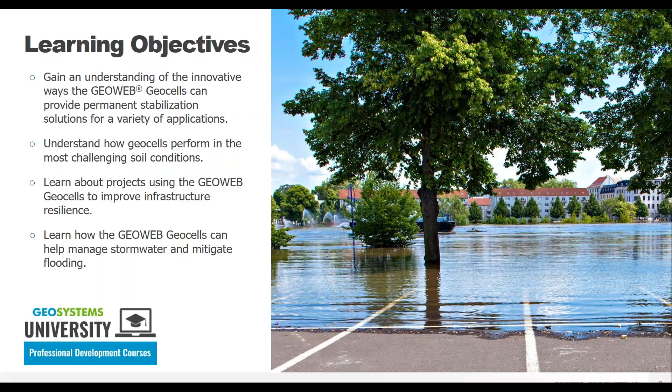A little bit of background on who Presto Geosystems is: we worked with the U.S. Army Corps of Engineers to develop geocell technology in the late 1970s and have been innovating in this market ever since. Our products have been used in over 200 countries and in every state in the United States.

We go beyond simply providing a product. We're here to help you provide a complete stabilization solution.

We operate in 3 product areas. We offer different solutions: soil stabilization using our GeoWeb geocells, which can be used for load support, slope and channel protection, and constructing green retaining walls. This is going to be our focus for today.

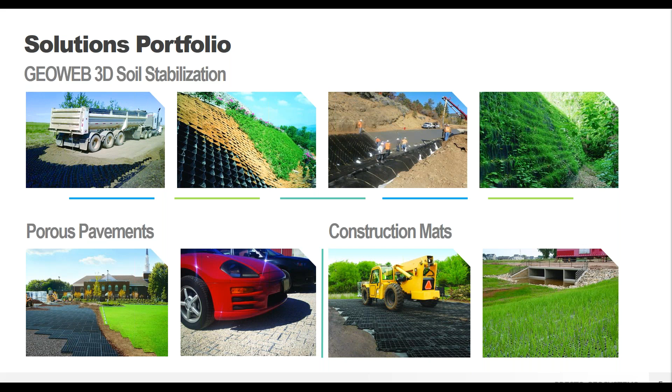We also offer porous pavements, where we have both a vegetated and a stone option, and also lightweight reusable construction mats. If you have questions about either of those product categories, more than happy to talk about them offline on a one-to-one basis. But today we're focusing on the GeoWeb 3D soil stabilization system.

Okay, so let's cover some general information about the GeoWeb geocells. For those of you who might not be familiar with this type of product, like I said, we've been doing this for about 40 years, but it still is a bit niche, and maybe you haven't heard of it before.

So the GeoWeb system is our version of geocell technology, and it consists of two main attributes. The first is the cell or container size. The cells come in 3 diameters, small, medium, and large, and then have cell heights of 3, 4, 6, 8, and 12 inches, so 5 different depths to choose from. The dimensions you choose for your GeoWeb cell are going to be dependent on your project details, whether you have specific vehicle loading requirements, what your slope dimensions look like, that sort of thing. And we here at Presto Geosystems can help you determine which one is going to be the most appropriate for your specific job.

Another thing I want to point out is the ultrasonically welded seam, and that's where all of the connecting points are. That's really important to the function of a geocell in general. The stronger the seam strength, the better the performance of the geocell. So a strong seam allows for heavier infill material, steeper and taller slopes, and better overall lifetime performance.

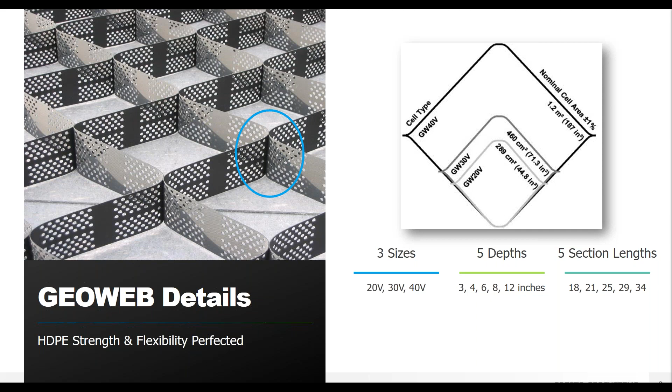So to avoid things like weld failures or the damaging effects of differential settlement on an extremely stiff product, uniformity in performance across all the elements of a geocell system is going to be much more important than focusing on a single property alone. You'll probably hear me say that a lot, especially at the beginning here. Uniformity in the geocell and in the geocell performance is going to be kind of the key takeaway that I want you to have here.

So I said there were 2 main attributes to a geocell system. The first was the actual geocell material itself. The second main attribute is the infill material, so it's what you put in those containers. An important benefit of the GeoWeb system is that even a low quality aggregate, sand, or even salvaged materials such as recycled concrete or asphalt can be used to infill the cells. Using salvaged aggregate or sand can save a significant amount of money on things like material and hauling costs. You can also eliminate the fines within your material because the cells themselves of the GeoWeb panels provide the confinement and aid in compaction of those cohesionless materials. So you don't need a cohesive material to get that compaction, the GeoWeb cells are doing that work for you.

And if you do eliminate those fines, you can significantly improve the drainage of the system and let water flow freely, preventing pore pressure buildup and preventing global failure of the system due to that hydrostatic buildup. So definitely a benefit.

And the ability to use those sands and those low quality aggregates really sets the 3D GeoWeb system apart from things like planar geogrids or geotextiles. These products require the use of really high quality materials that have extremely high friction angles to achieve that optimal performance with the 2D system. But with the 3D GeoWeb system, using that low friction angle material is going to be just fine. The GeoWeb panels can achieve their full potential even when using poor quality materials, so definitely a huge cost savings there.

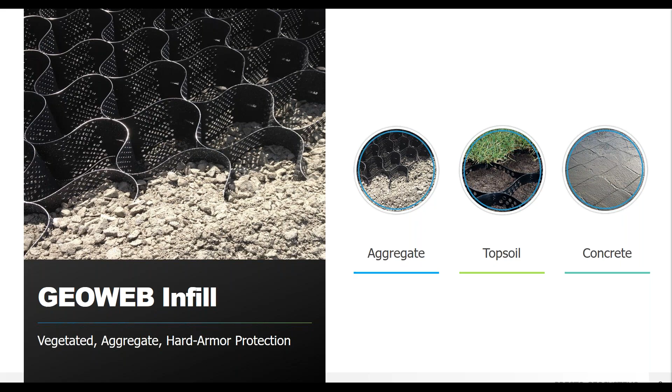So the system components to the GeoWeb system are the add-ons to the GeoWeb cells themselves. These are all the supporting pieces that help the GeoWeb system protect your project site and assure that uniform performance across the whole site area. You're going to avoid differential settlement and damaging effects of different materials. So uniformity is our keyword at the moment.

Thinking back a few slides, the GeoWeb panels come in discrete sections, and the average size of a section is around 250 square feet. Your project is most likely going to be bigger than that, so multiple panels are required. So we have what's called the Atra Key. This is the first component of a completely integrated system, connecting each individual panel of GeoWeb into a single web that covers your entire project site.

It allows for faster installation of the GeoWeb panels and is going to last the lifetime of the project, ensuring that your road, slope, or wall is protected and that the GeoWeb system isn't going to fail under anticipated loads. The specific engineering values of the Atra Key ensure that the system holds up to loading over time without the corrosion seen in metal staples or the failure of underperforming, weak plastic cable tie systems.

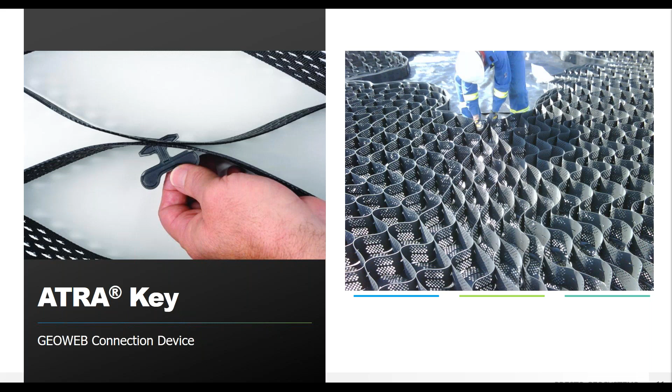We do have a specification sheet for the GeoWeb system, and it calls out this specific type of material. It has specific engineering values for this patented connector, so that you know you are getting the right material to help hold the GeoWeb system in place.

I also briefly want to mention that we offer a specialized version of the Atra Key: the Atra Wall Key. It's designed specifically for connecting GeoWeb retaining wall sections. We're going to get to talking about retaining walls in a moment, but keep this in mind. The Atra Wall Key is the only GeoCell connector available anywhere designed for use in exposed wall face applications, formulated to withstand environmental weathering and ultraviolet radiation.

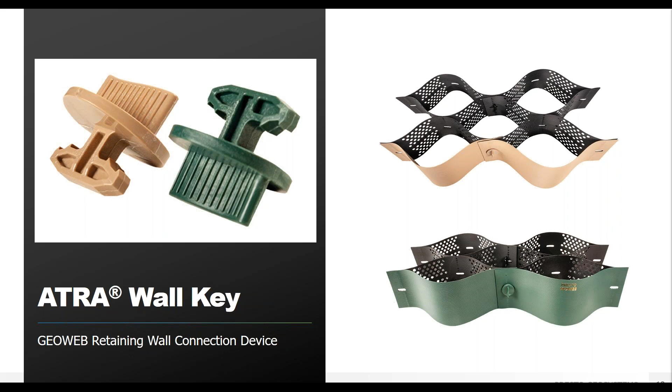The Atra Wall Key is not going to corrode or degrade over time like zip ties or metal staples. Even in really harsh environmental conditions, it can be submerged in salt water without any degradation. Pretty much anything you throw at it, it's going to hold up. Securing sections with the Atra Wall Key is a lot faster than using staples or zip ties, requires no specialized or electrical tools, and it's easy for a single person to do—single turn, click it in place, ready to go. So the Atra Wall Key and the Atra Key are both specialized components that help with that uniform system I want to make sure you're aware of.

Next we can take a closer look at the anchorage options. If the GeoWeb panels are laid completely flat, anchorage is usually not necessary because gravity is doing all the work to hold it in place. However, if you place these on a slope and that angle starts increasing, you get the driving force of the infill material exceeding the resisting frictional force of your slope. So overcoming all of that, it wants to slide to the bottom of your slope, and you want to avoid that with some sort of anchoring option.

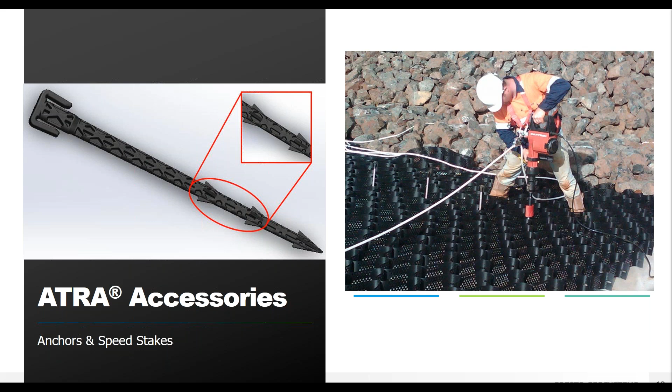For shallow slopes, a general rule of thumb is if it's shallower than 2 horizontal to 1 vertical, around 26 degrees, you can use stake anchorage. We have two options: a standard steel rebar, and one made of pure high-density polyethylene, which is pictured here. HDPE might be good if you're in a saltwater environment, like along a coastline, since metal would corrode there. Just an option—but both are easy and fast to install, nothing too unusual about stake anchorage.

But the other option that maybe people aren't as familiar with is the tendon option, which is for steep slopes. If you're getting steeper than that 26-degree slope, or if you're over a surface you can't puncture with a stake—like a geomembrane liner over a sediment pond, where you don't want to puncture through that liner and defeat its purpose—you need to be able to suspend the GeoWeb system over that liner without damaging it.

So that's where we would recommend a tendon anchorage system. These are polyester tendons that are run through the GeoWeb panels, you can see them in the photo there. And then you use our Atra tendon clips, which are load transfer devices. Basically, they take the load from the soil to the tendons to the GeoWeb panels and then up to the crest of the slope. So just something to keep in mind.

Again, we can talk about this in more detail if you are curious how it works. But it is specifically designed for the GeoWeb system, helps with that uniform performance, and is going to last the lifetime of your project, as opposed to something that's going to degrade or break down over time due to environmental conditions.

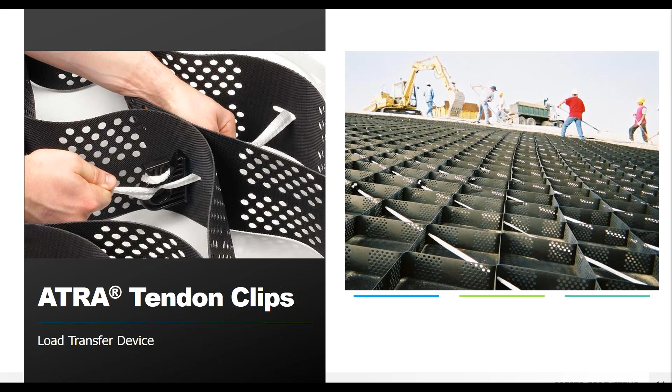Okay, so something I want to point out goes in line with everything I've been talking about recently, about that uniform performance and how a geocell performs. It is critical that both the factory welded junctions, the internal seams I pointed out a couple slides ago, and the field joined junctions, the Atra keys and Atra wall keys I pointed out as well, perform at a level commensurate with the cell wall.

You want the junction, you want those seams and those keys to be as strong as the GeoWeb panel itself. Otherwise, you're just introducing a point of failure. So the three primary elements of that GeoCell system, the cell walls, the internal junctions, and the mechanical junctions, all must perform uniformly as a complete system.

As I mentioned before, an incremental improvement in one characteristic, such as wall stiffness, is only going to be valuable if there's a complementary improvement in the other components of the system. So as stiff as you make the cell wall, you have to make the junctions and the field connectors the same stiffness. Otherwise, now you have a point of failure, and that increased wall stiffness doesn't mean anything because it's going to fail at the junction before it would fail in the cell wall.

So Presto Geosystems does offer solutions for many different types of road and highway applications. This includes load support for unpaved roads where you have a gravel surface, road shoulders, and base stabilization underneath paved roads. And then stormwater control is also possible with the GeoWeb system through things like roadside ditches, drainage channels, culvert outfalls, and having that aggregate system be a little more porous to allow some pervious pavement aspects as well.

So the purpose of cellular confinement of the GeoWeb system is pretty simple. It's meant to stabilize the movement of unstable soils, both horizontally and vertically. The weaker the subgrade conditions, the more practical it is to insert the GeoWeb system into your design. So it's an engineered system integrating a couple different types of geosynthetics with the best method of confinement and subgrade stress reduction in the industry.

So today's focus is going to be on a lot of different types of how the GeoWeb system works. But if you do have specific questions on roadway infrastructure, such as intermodal yards, railroad ballast reinforcement, things like that, feel free to reach out. We have extensive knowledge in that as well. So if there's something specific that I don't get to today, this is a really general overview. Please feel free to drill down and get into specifics. We would love to talk to you about it.

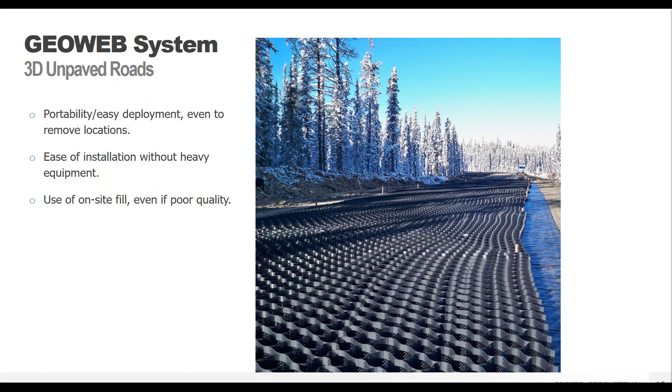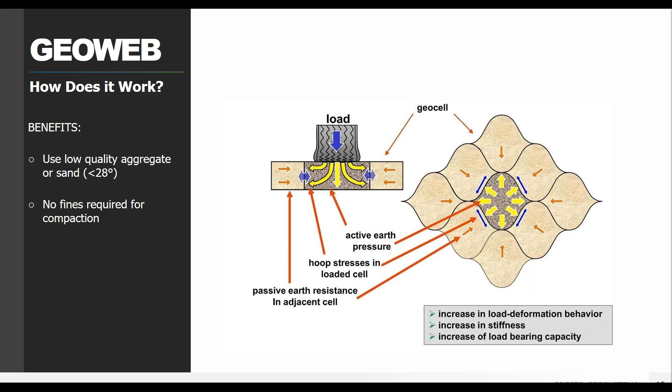So in a load support scenario, vertical deformation can really only occur when there's either compression or compaction of the soils, or through lateral movement of the soil. So by spreading out the load in a classic granular fill approach, one can reduce the compaction of near surface soils, but only with cellular confinement can one ensure that there's no lateral shifting. So there's not going to be any ruts, you're not going to get potholes, you're not going to get those sunken drive lanes.

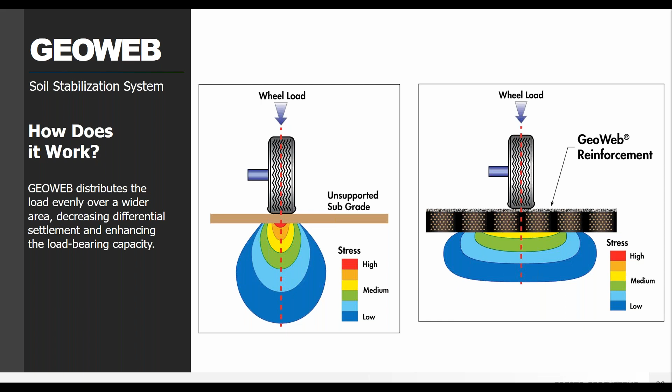The mattress effect of the GeoWeb system reduces the stress reaching your subgrade. Here you can see the stresses on the subgrade of the unsupported grade on the left, and then with the GeoWeb reinforcement on the right. You can see how there's a complete elimination of the highest stresses, the red and the orange, at the surface of the system when there's GeoWeb reinforcement. So the stresses are reduced and then distributed over a wider area - again, that's that mattress effect. So it's going to reduce your stress reaching the subgrade, leading to a significant decrease in deflection and rutting.

And again, by eliminating that lateral particle movement, the soil isn't getting pushed to the side because of vehicle tires. The GeoWeb system can stabilize the surface, eliminating the need for constant maintenance. You're not having to go back and grade out, refill in the ruts, that sort of thing. It's just going to be a good, smooth surface for the lifetime of the project.

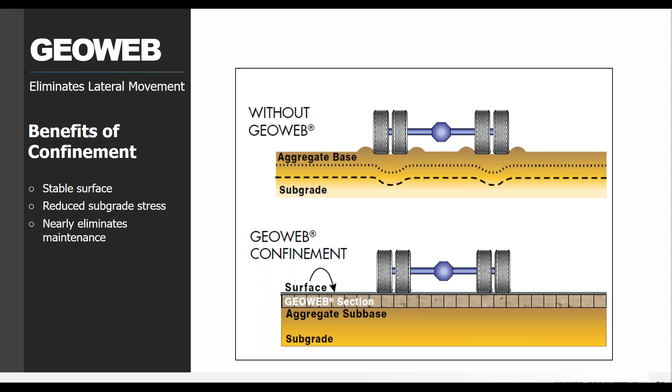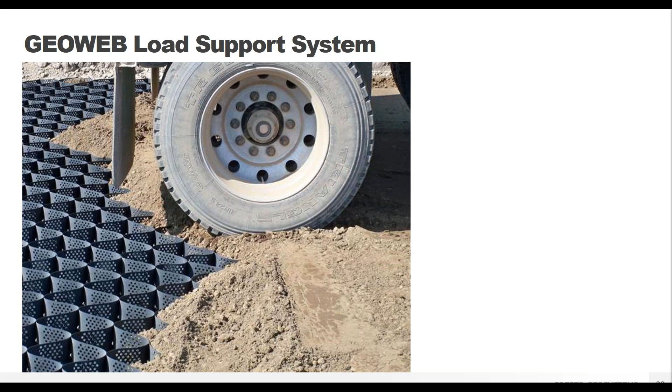So here we can see an impressive load support benefit. This is an 80,000 pound loaded dump truck, using standard AASHTO H20 loading parameters, on a partially filled GeoWeb panel. You can see how the cells push back against each other to support the load, and that only the adjacent cells need to be filled for support. This is a great benefit to using the GeoWeb system, that you don't have to have every single cell completely filled before the road is actually usable. So you can reduce your construction time, your materials, that sort of thing. You can actually use the road as you're building it as an access road to new locations.

So the GeoWeb system is often compared to 2D geogrids, and they do start with a similar concept. However, due to the 3D nature of the GeoWeb system, it's got that defined depth. The integrated infill plus geosynthetic system acts as a composite layer where the lateral earth pressures are mobilized and transferred across a three-dimensional network of integrated cells. So basically, by having that depth and that confinement of the material, you're actually creating a layer that's going to help reduce that stress. Whereas with a 2D geogrid, you're inserting the geogrid and then you have to find your confinement and your strength through other means.

So we're making that into one thing with the GeoWeb system. This is where it can be really beneficial, in that you can use those low quality aggregates. You can use sand, salvaged material from excavations, recycled concrete or asphalt, things like that. You don't have to bring in expensive engineered aggregate like the geogrids require. You don't need that with the GeoWeb system.

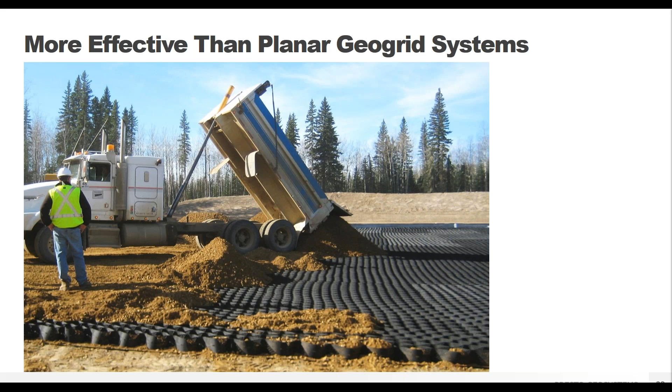Another thing to point out is that geogrids do very little to stabilize the surface. With the lateral confinement within the GeoWeb panels, you're not going to get those ruts. You're not going to see the lateral shifting of your aggregate or soil particles that you constantly need to come back and fix. Geogrids don't protect against that, so you're going to have that constant surface maintenance with a geogrid. You're not going to with a GeoWeb. Just something to keep in mind.

Continuing the theme of unpaved gravel surface roads, using a washed or clear stone in the GeoWeb system allows you to build stable and permeable low impact development access roads. Site access, either temporary or permanent, is a pretty common application. So if you're going through environmentally sensitive areas, wetlands, or along coastlines or shorelines, where you really need to make sure you're not impacting the flow of water in any way, having a permeable aggregate road like this is a great solution.

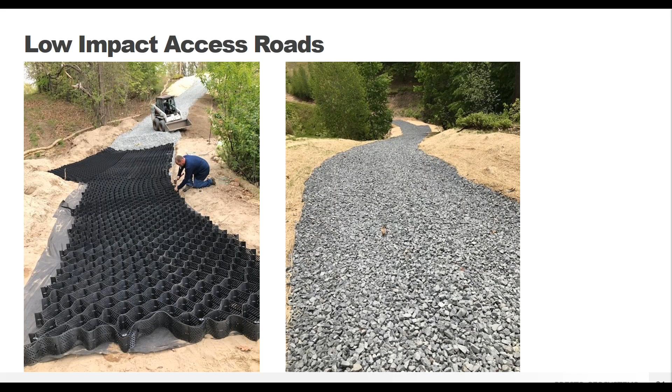Heavy loaded vehicles can still drive on the GeoWeb system even in sensitive environments like that. Normally you're not going to drive a dump truck through a wetland, it's just too soft and mucky. With a GeoWeb stabilized road, you have that ability, that option. Definitely something to keep in mind if you know you're going to encounter those types of environments. With the GeoWeb panels, you can bridge those soft, wet areas of ground with little to no disturbance.

Saturated soils usually don't support any type of vehicles, let alone heavy vehicles, and you're really doing damage to the environment when you try to drive through them when they're flooded, like the inset photo there. So things like adding a woven geotextile underneath the GeoWeb panels can help add additional strength to the system, and they're not going to get clogged by your subgrade materials, so it's still allowing for that free water movement. Having that clear stone, again without the fines, allows water movement through the system in a way that a concrete or asphalt road wouldn't allow.

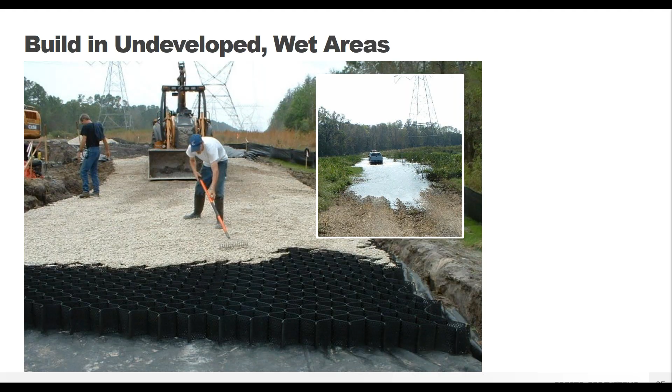So this is going to be our first case study. This was a project for Duke Energy down in Florida. They needed to install new transmission towers through wetlands, because Hurricane Michael had come through this area. The high winds and debris picked up during the hurricane actually demolished over 100 transmission towers through this area, all of which had to be restored over this extremely soft subgrade.

You can see how easily even just boot prints are being formed in this soil, so you can imagine trying to drive construction vehicles was a nightmare. The GeoWeb system was used for access and maintenance roads, as well as creating maintenance pads around the base of each of the towers.

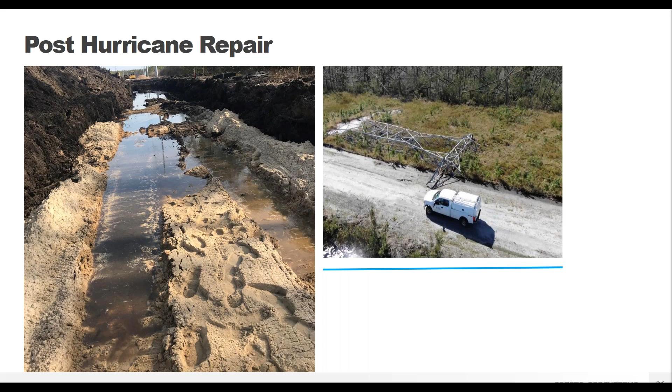The saturated sand in this area really couldn't support any type of vehicle load, so an enhanced woven geotextile was placed over the subgrade, adding an additional strength layer to the system. It wouldn't get clogged by the sand or the flowing water, and it was able to hold the stone infill material in the GeoWeb panels without letting it sink down into the wetlands muck underneath it, providing a bit of confinement as well.

The GeoWeb panels were actually filled with a really low quality aggregate that was locally sourced. This made it a little easier for these remote locations through the wetlands to use a locally sourced stone rather than having to find an engineered stone manufacturer and truck it in from long distances.

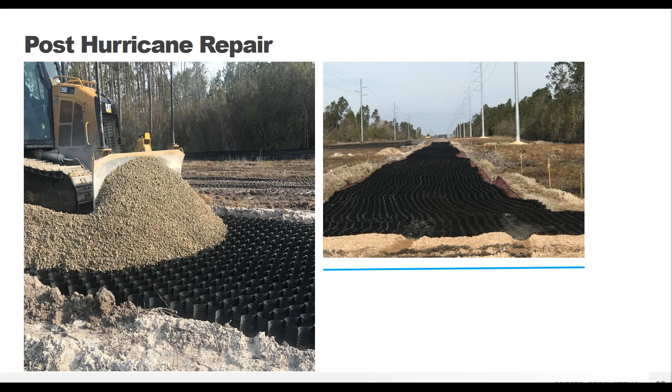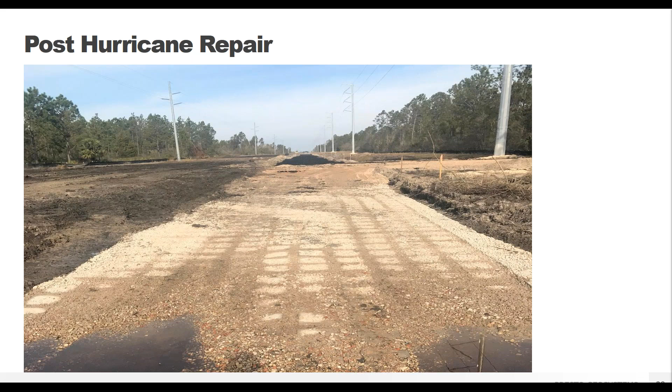Once the panels are filled in, both wheeled and tracked equipment can easily drive over these systems. Even if you have sand, which is usually more of a challenge for tracked equipment, it's not an issue with the GeoWeb system.

That was an overview of load support. Another big thing the GeoWeb system can do is embankment stabilization. Many times slopes and embankments need to be stabilized after or in conjunction with road and highway construction. They're vulnerable during extreme weather events, especially a high rainfall event you weren't anticipating. That's potentially where you'd see slumping of material or erosion covering your road, requiring you to take the road down to fix it. So we want to help prevent that.

The GeoWeb system for slopes can be filled with different materials depending on your project needs. Topsoil with vegetation is probably most common, but sometimes vegetation isn't appropriate, maybe if you're not in the right environment. So you could also fill in with stone or even concrete, whatever you're looking for.

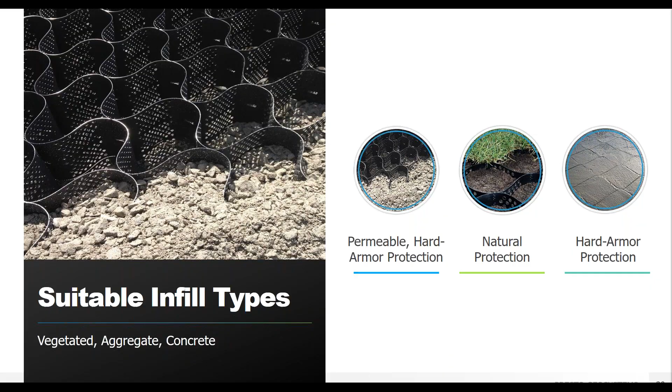You put the GeoWeb panels directly on top of either that geosynthetic or your native ground, and take that all the way from the toe of the slope up to the crest. Then you'll have it in some sort of crest anchorage trench, and you'll fill it in with topsoil, stone, or concrete, along with some sort of anchorage system.

We talked about this at the beginning: you can either use stakes if you have a really shallow slope, less than 26 degrees as our general rule of thumb. If you have a steeper slope or a geomembrane liner, you'd do a tendon system with crest anchorage, typically something like a deadman pipe, earth anchors, or rock anchors. We can help you determine what's most appropriate for your project site and how much anchorage is necessary.

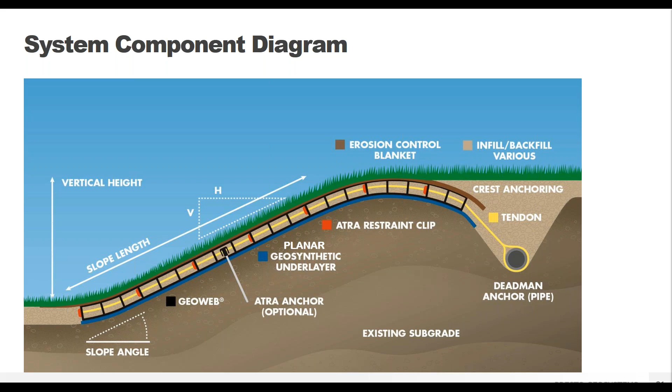The GeoWeb system, especially when filled with topsoil but on a slope in general, works to prevent significant movement of the soil by confining it within each individual cell. By separating the soil into smaller segments, the system resists mobilization of the entire slope face due to hydraulic load, so you won't get mass movement of soil due to water flow.

It's important to reiterate that proper installation of the GeoWeb system includes embedding the panels into the crest of the slope. This prevents water from flowing underneath the GeoWeb panels and undermining the system, so you won't see rills or gullies forming underneath the panels that could lead to failure.

And a system that provides a way to fully vegetate slope surfaces that otherwise might not be able to support sustainable plant life. It also increases overall slope stability by interlocking with the vegetative root zone. You could also go with stone or concrete infill if your slope is in a really arid environment where you don't think vegetation is going to grow. Choosing stone might be the right option.

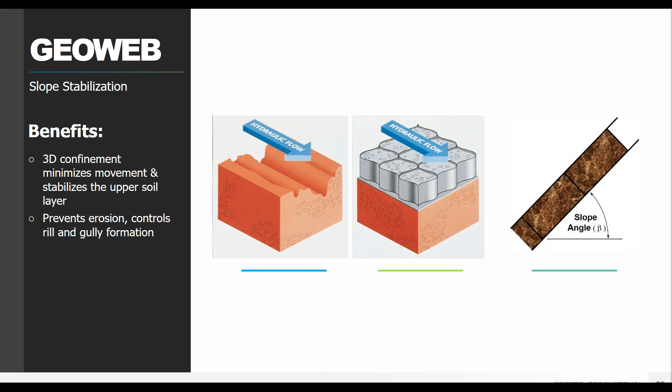Vegetated slopes are probably the most common. They result in the most attractive slopes, with little to no maintenance. Once everything's in place, you just let it grow and kind of set it and forget it, which is nice.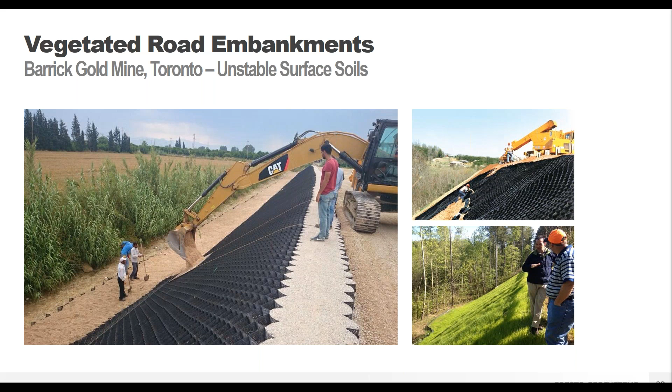So this was a vegetated road embankment. It was actually over some unstable soil in an active gold mine up in northern Canada. The access road was going to be built above the slope, kind of where the equipment is right now. So the slope had to be stable enough to support live traffic loads, and not allow constant erosion that could potentially undermine the road. Using the GeoWeb system helps stabilize and support the slope. You can build the road right on top of it and you're good to go.

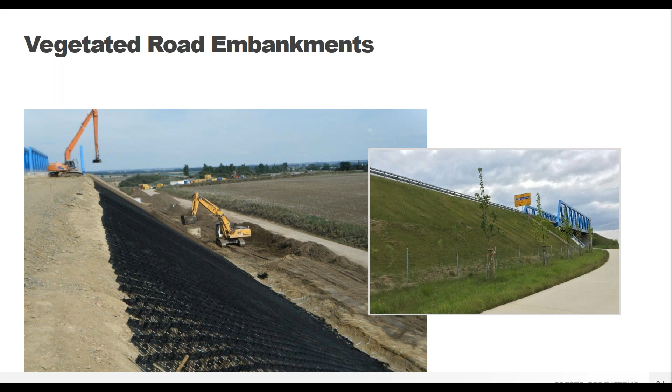So this was another view of that same area. You can see how space constraints are sometimes an issue, either at the toe or at the top of the slope. Sometimes you can't regrade your slope into something gentler that wouldn't need stabilization. You've got to keep this steep slope in place because of existing infrastructure, like a guardrail installed at the crest, a fence at the toe, roadways already there, that sort of thing. So you can put the GeoWeb panels on these steep slopes without interrupting the existing infrastructure. It's a great benefit when you have these tight spaces where you can't do any regrading activities.

So this was another roadway, alongside a road in the state of Ohio. This is a pretty common problem solved with the GeoWeb system. Erosion and washout of soil slopes onto road surfaces is a problem in a lot of locations, especially as you get more extreme rain events than you maybe weren't anticipating. So covering the slope with the GeoWeb system and filling it in with topsoil allows for that vegetated slope without the concern of constantly having to replace the soil after storm events.

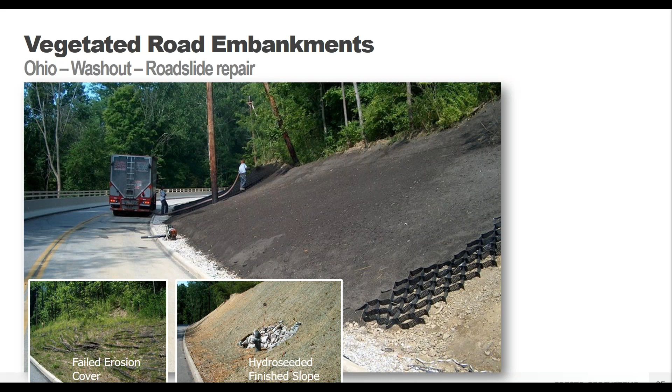We do recommend some sort of surface protection, typically something like hydro seeding, or even erosion control blankets. These can be used with the GeoWeb panels until the vegetation has a chance to grow. But then you're still going to get that nice green vegetated slope, and you don't have to worry about constantly coming back and cleaning up the road after erosion, anything like that.

Embankments along roadways do have to deal with sheet flow runoff from impervious road surfaces. This was a slope for the Maryland State Highway Administration. The sheet flow was actually causing sloughing of large sections in the upper topsoil layer, had deep rills and gullies, was preventing vegetation from forming, and was threatening to undermine the road itself. The GeoWeb system was placed over the already eroded soil, was able to hold everything in place and support that sheet flow runoff from the roadway. So no more gullies, and you were finally able to get full vegetation growth with some really deep roots that again help stabilize that soil.

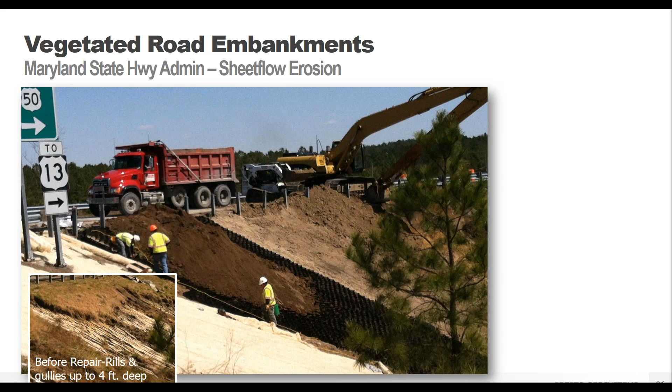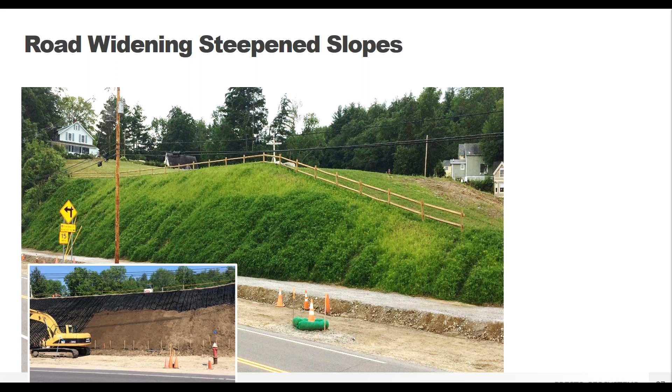Road widening is also becoming a lot more common with state DOTs trying to find more road space without displacing any significant structures. Things like slopes and embankments are usually where that additional space can be found. This was a road widening project in New Hampshire. The GeoWeb slope protection system allowed for steeper slopes to be created without erosion concerns. The system can be installed quickly and then also vegetated really quickly so that there isn't a long construction time that may shut down important roads. So ease and speed of construction are important features of the GeoWeb system. Everybody appreciates that sort of thing.

So this was a hurricane erosion mitigation project down in South America, along the Zarumilla River between Peru and Ecuador.

The river is full of mangroves, and existing currents could easily pick up loose sediments and soil, eroding the banks and threatening infrastructure. Extreme El Nino events had caused catastrophic flooding in this region, and climate experts predict more severe storms coming off the Pacific in coming years. So they wanted a permanent solution to help hold the river in its current location, even with these more extreme events.

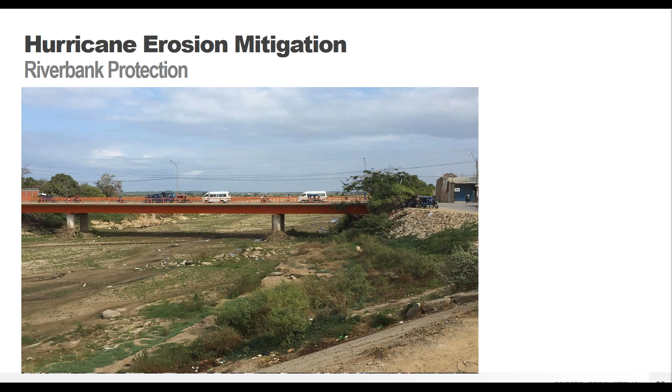During a brief dry spell, the riverbanks were cleared of vegetation and regraded to allow for installation of the GeoWeb slope protection system. The system provides excellent resistance to sheet flow, preventing formation of rills and gullies, especially in areas of concentrated flow over erosive soils. In many areas of this project, protecting the slope surface allowed for construction of steeper embankments with less horizontal footprint, conserving valuable land space.

Contractors were able to install about 2.5 million square feet, around 230,000 square meters, of GeoWeb system along the compromised riverbank. Installation rates are pretty quick—typically around 1,300 square feet per hour for a crew of 4, including the operator. So give or take that a little, but you can move pretty quickly with this sort of thing.

At the Zarumilla project, the contractor further optimized installation rates by pre-staging the sections and assembling the system at the crest before expanding the panels down the slope face. So there are little tips and tricks we can help you with if you're looking for a really fast installation.

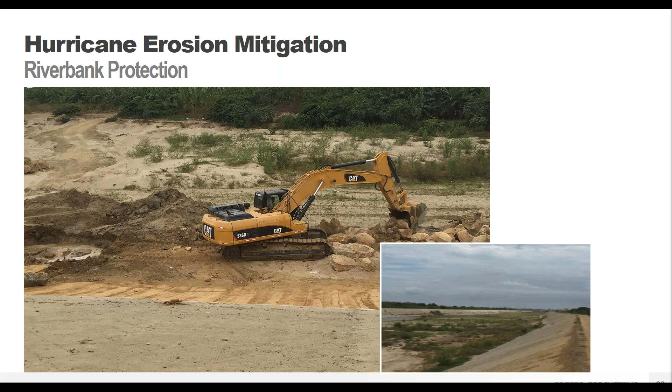The GeoWeb shoreline protection system ended up using a concrete infill for the Zarumilla riverbank to protect against future storm events. The GeoWeb system with concrete infill provides economical hard armor protection of slopes and channels when exposed to high flow velocities and high shear stresses.

The system has been proven to withstand sustained flow velocities of over 36 feet per second, around 11 meters per second, and shear stresses of about 21 PSF. So this is going to outperform things like riprap, gabion baskets, and other typical conventional hard armor strategies. It's definitely the option to choose when you know you're going to have really extreme flow environments to deal with. The quality, surface finish, and thickness of the concrete can all be selected based on your project specific needs.

The concrete filled GeoWeb system comprises flexible poured-in-place sections that are more economical than things like articulated concrete blocks, or ACB systems. And they don't require any specialized equipment to install. It's quick and easy, and doesn't take any specialized training.

You're just connecting all the GeoWeb panels, expanding them down the slope, and pouring concrete directly into the GeoWeb panels. This eliminates the need for form work because you're pouring into the panels—you don't need additional forms to hold the concrete in place, and you don't need things like rebar or fiber reinforcement because the GeoWeb panels act as that internal reinforcement.

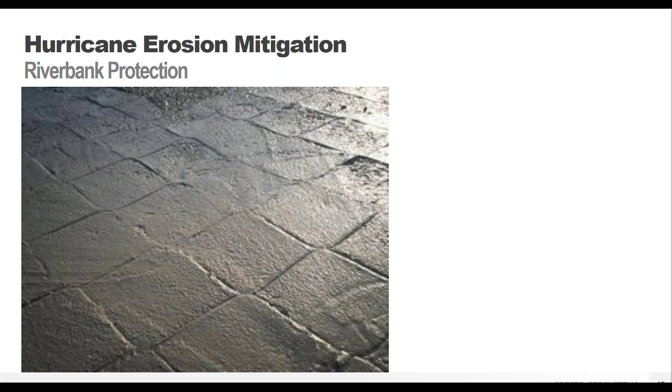This whole project took about 4 months to install. Keep in mind it was around 2.5 million square feet, and that included the excavation work prior to placement of the GeoWeb system. So pretty quick overall. Again, that GeoWeb system becomes a flexible concrete slab that conforms to subgrade movements.

It prevents uncontrolled cracking and reduces the potential for piping and undermining of the system. So all good things when in these really wet environments that are going to see extreme flow events.

The work can also be integrated into existing infrastructure in the area. The GeoWeb protection was placed up against bridge abutments, and it formed around culverts and drainage areas. So you don't need to redesign what's already in place—you can just work with roads, bridges, and the landscape to create a solution that'll work. And with concrete, it's a permanent solution, even in these extreme weather regions.

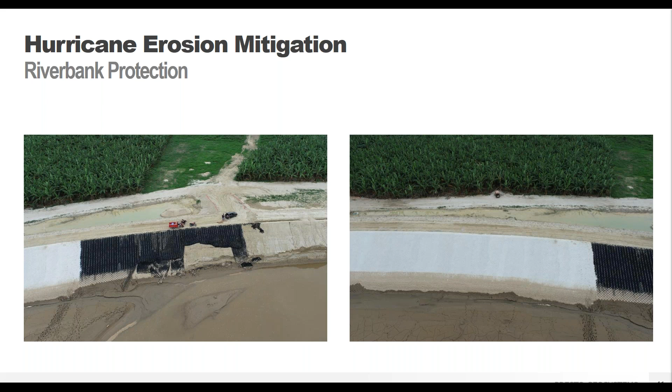So the GeoWeb shoreline protection is performing to expectations and is going to provide much needed protection to the Zarumilla River and the communities that depend on it for when that next major storm hits, because we all know it's going to.

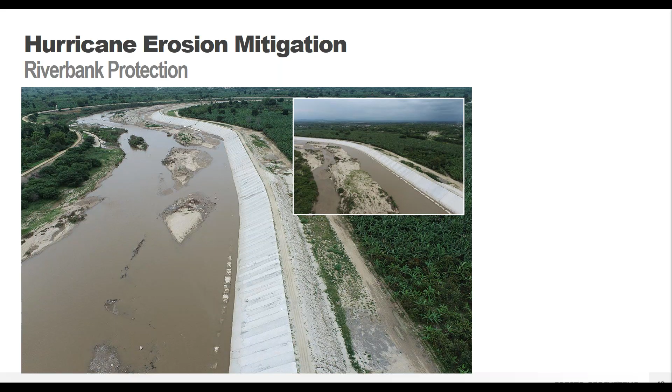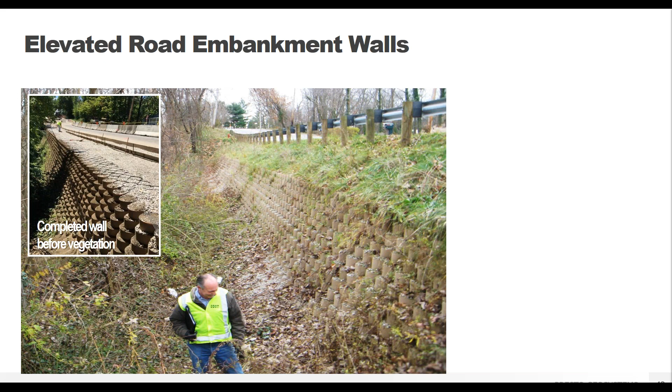If global stability of your slope is a concern, or if you have a very steep slope—think 65 degrees or steeper—embankments should be built as a retaining wall rather than just surface protection. The GeoWeb panels can be stacked vertically, one on top of another, to create a gravity retaining wall, and you can add GeoGrid tieback reinforcements if necessary. It's going to be pretty similar to your standard MSE block or gabion basket wall. The walls can be filled in with topsoil in the front cells to create living green walls, and they can support vehicle or building loads above them.

There are two different options for GeoWeb walls. You can have gravity style walls, where you build it up basically as a triangle, with longer pieces on the bottom going up to something narrower at the top. Or you can have GeoGrid reinforcement, where you have GeoGrid tiebacks going back into the soil behind the wall, adding additional friction into the system to help hold everything in place.

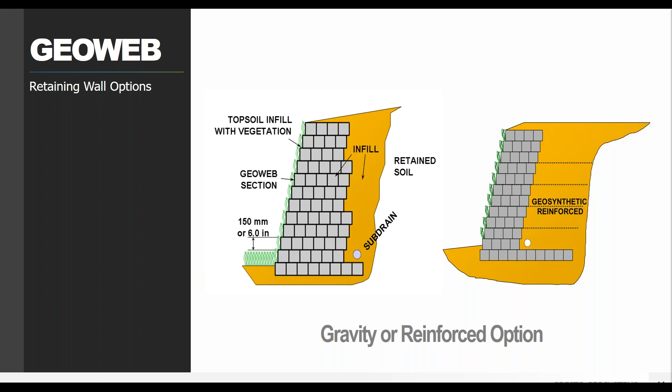Seismic performance is definitely a concern in certain areas of the world—perhaps not in Kansas, but definitely on the California coast. When you know you have the potential for some pretty seismic activity in the area, going with the GeoWeb system is a great solution.

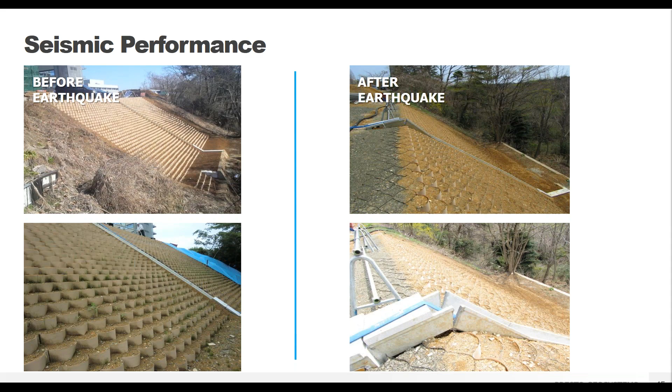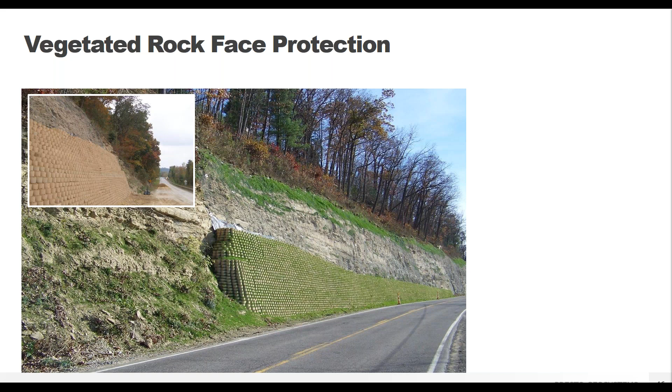This was an Ohio DOT project where a 20-foot high wall was constructed to keep the rock face from eroding further. The GeoWeb system acts as a fascia against the rock wall that helps protect the road without taking up a lot of horizontal space. This is a great option if you have unstable rock walls or steep soil slopes in seismically prone areas. The GeoWeb wall can support and maintain that wall face during normal times, and after a good ground shake, the GeoWeb wall will still be in place, helping prevent rock falls or landslides from compromising your roadways. It's something to keep in mind if you have roadways that could be totally covered, which would be devastating if the road had to be closed. This is a great way to try to help prevent that.

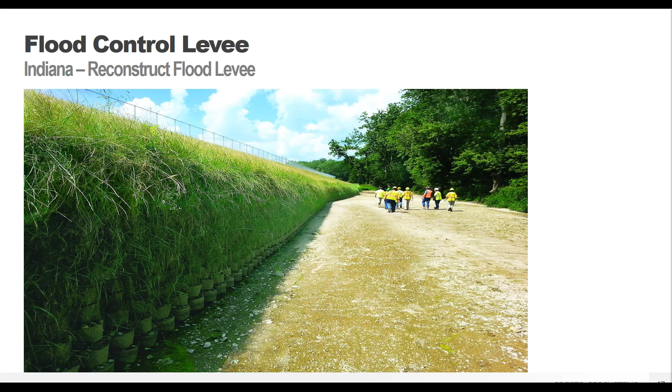The GeoWeb system works really great here—you place the panels along a shoreline, and it helps prevent erosion due to water movement, withstanding direct or indirect wave action. Either directly up against the panels, or as the wave action goes down the channel, sideswiping the GeoWeb wall, either way it can help protect against that wave. This project was hoping to keep the channel within its banks.

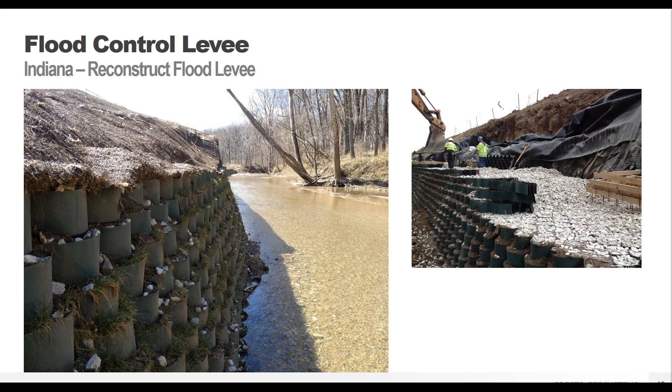So they were able to build up the GeoWeb wall. Because this was an area that was going to flood, they didn't bother trying to get nice, pretty vegetation to grow within the GeoWeb panels. They filled it in with just their excavated material—a little bit of soil, a little bit of stone, whatever they had on site. And that's perfectly fine, to use that sort of poor quality or mixed quality infill material. It's going to work just as well within the GeoWeb walls as anything else would.

So here you can see after everything was in place, they were able to put a small slope above the wall to get to the grade that they needed to. The wall is now in place. It's going to hold that channel within its banks. It's not going to allow for further erosion.

And when flooding does come in, the channel can rise and go the whole height of that GeoWeb wall. You're not going to have to worry about any failures or coming back at any point to fix any damage. So your stormwater can get where it needs to go without compromising any surrounding infrastructure.

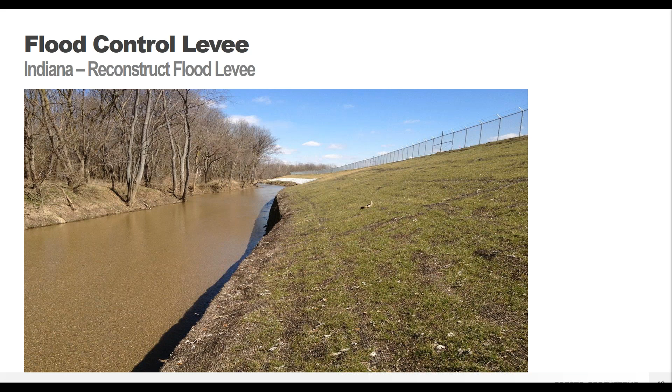So this was just a fun project I kind of want to highlight with the GeoWeb wall. This was actually avalanche protection, done in a small town in northern Iceland. They needed a permanent avalanche protection wall, but they didn't want it to look too unnatural, so a bit of a compromise there - a vegetated GeoWeb wall came in.

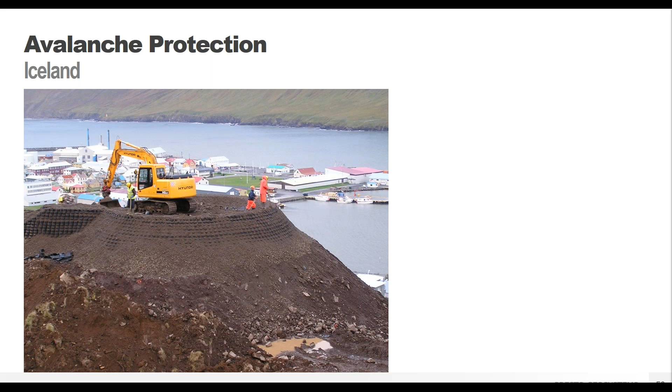So this wall was actually built from the ground up, completely freestanding, rather than integrating into an existing wall or slope. The wall had to be built so that it would protect the majority of the town from those anticipated avalanches in a couple different directions. So the GeoWeb wall actually curved and moved with the landscape, and the internal strength of the GeoWeb wall is enough to withstand that first huge impact of snow.

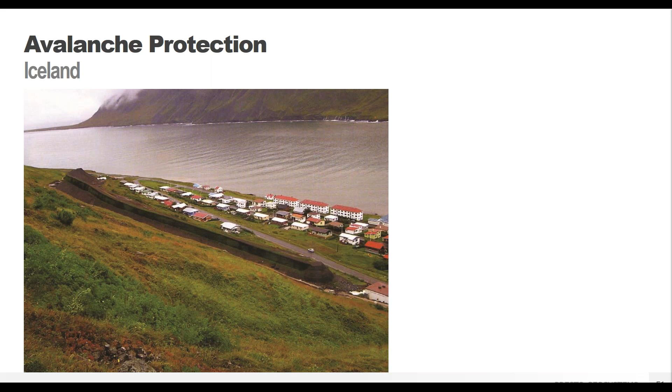And then the structure had to be high enough that it would allow for significant buildup during that avalanche event. Access roads were built around and actually on top of the GeoWeb wall to make sure the structure stayed clear of obstructions and could be cleared up after that avalanche did occur.

So here you can see it starting to grow, grass starting to get a little greener, look a little nicer. Eventually, all of that black plastic was hidden from view once the grass came in. And now the town has a permanent solution and protection against their own extreme weather challenge.

So obviously not something that a lot of people have to worry about. Most of us are, thankfully, not in avalanche-prone areas, but it's definitely an extreme weather event that does have some pretty devastating effects that the GeoWeb system can help with.

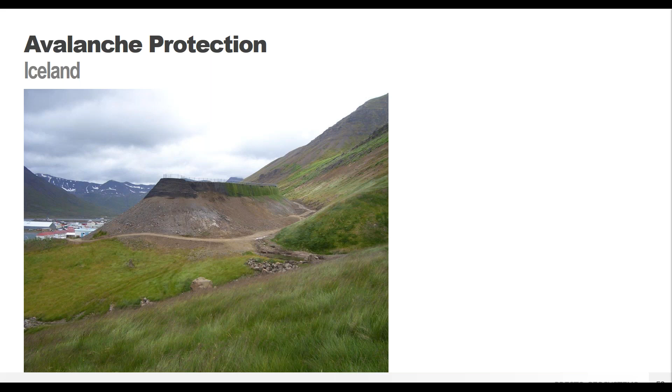Okay, last topic, running a little bit behind. So this is using the GeoWeb system for stormwater control for mitigating flooding after storm events or even hurricanes.

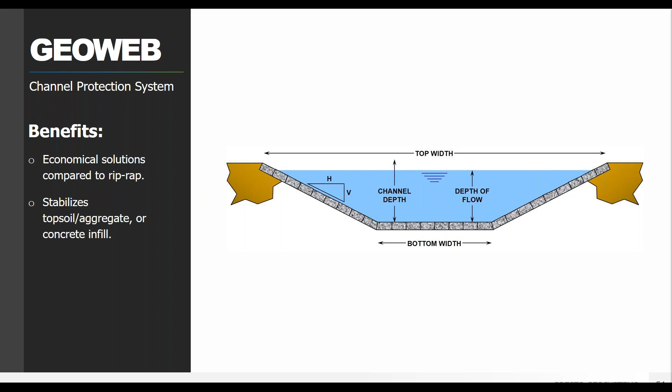The GeoWeb channel protection system is going to be really similar to the slope protection system. You can either cover an entire channel, so two side slopes and the channel bottom, or just a single embankment. You can have either continuous or intermittent flow, low to high flow, and a variety of channel dimensions. This system is going to be a lot more economical than the use of really large riprap stones or heavy gabion baskets, and again, you can choose your different infill materials to meet your channel needs.

We did do some really extensive research with Colorado State University, Dr. Chris Thornton out there, to show how the vegetated GeoWeb system can perform in channel conditions compared to things like riprap. We determined that when paired with a good turf reinforcement mat, a TRM, the GeoWeb system can resist extremely high flows, allowing velocities of up to 30 feet per second. That's huge compared to just a typical vegetated channel, which is around 4 feet per second - so really big difference there.

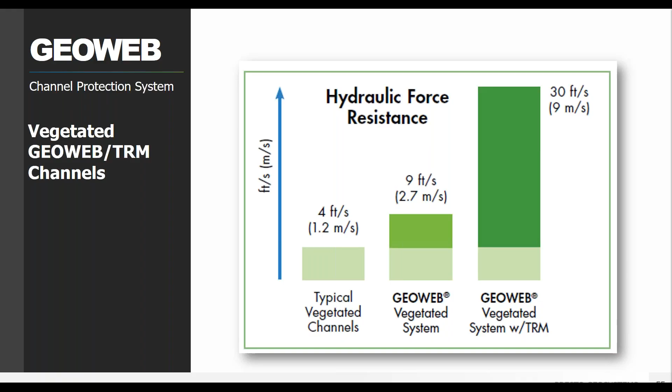So the GeoWeb system does, again, work great along those shorelines of stormwater channels - we've talked about this before. It's going to help prevent erosion due to the water movement, the wave action. One of the great things is you can actually choose how much protection you need. Do you want it to go just down to the top of the water line? Do you need it to cover the channel bottom? Things like that.

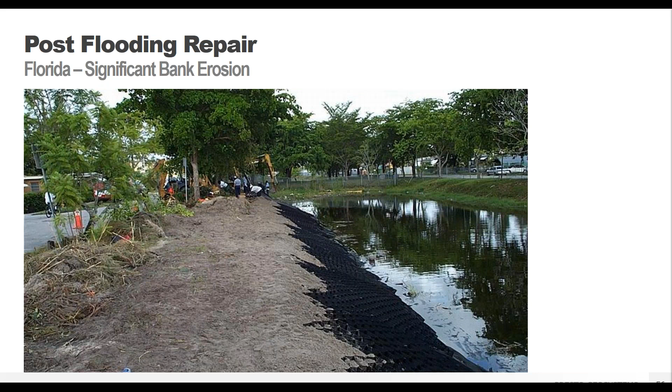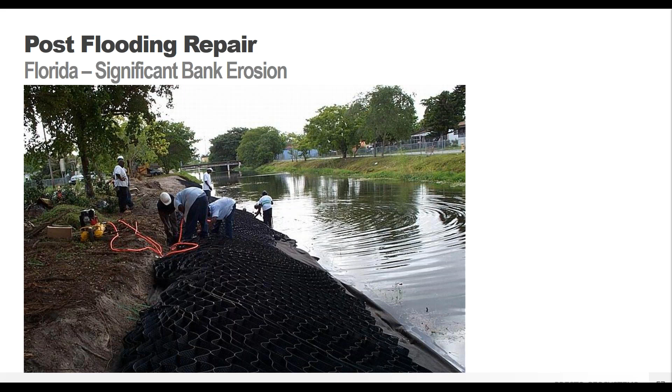So this one actually decided to place the GeoWeb panels both above and below the average water line. The panels went below the water line to ensure that they didn't get lifted up, and they were filled in with stone below the water because obviously vegetation's not going to grow when it's permanently submerged. Then they were filled in with topsoil and vegetation above the water line to make it look like a nice clean channel. That way it would still be able to support that water flow when flooding did occur, get up to that 30 feet per second that we just showed on the graph, and still look like a nice clean channel.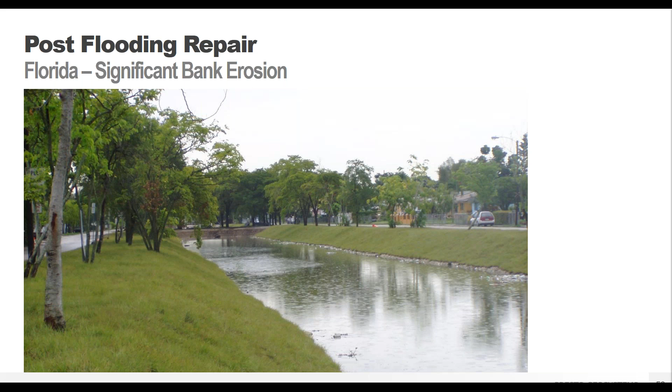You can also fill in with stone or concrete. As we've seen in the past, stone infill might be appropriate if you're in an arid environment or otherwise don't believe that vegetation is going to grow in your area. Like I said, vegetation does not grow in when permanently submerged. So if you do have that consistent water level, you might need to do stone below and vegetation above.

And then concrete is going to be the choice if you know you have really high flows. There's no restrictions in terms of flow velocity or shear stresses when your concrete infill is used. So steep channels or high flows after storm events, these are places where concrete infill might be helpful. You can even include things like baffles or energy dissipators within concrete filled GeoWeb channels. So if you know that you need to slow down your water or if you need to have it directed off in some way, concrete might be the way to go.

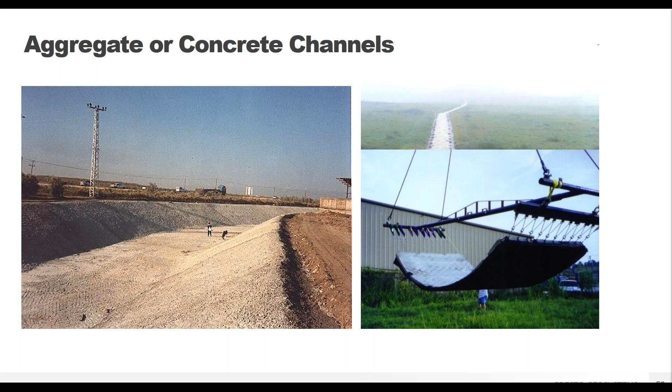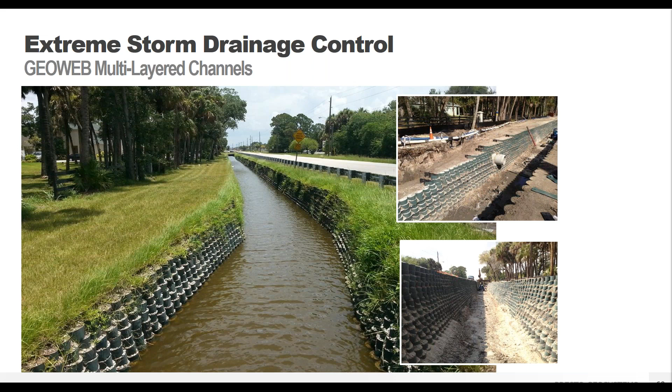So this was a stormwater channel down in Florida showing how the GeoWeb retaining wall system can be used. The stacked system is really great in urban areas where you don't have room for shallow side slopes or you don't have room for setbacks. And then you can, again, still use vegetation above the water line and stone below. You can also use it in conjunction with riprap, if you still need that due to local regulations or anything like that.

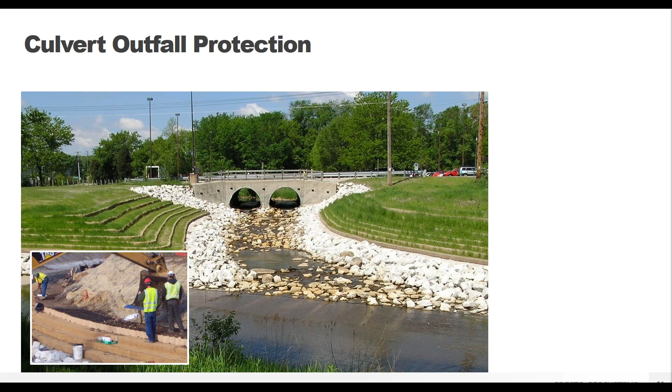So this was a culvert outflow in Milwaukee, Wisconsin. A strong surface protection, in this case they used a coir fabric, were able to help withstand those really high flows. Again, this is intended for short duration events rather than continuous flow. You can also go around existing infrastructure, such as those culvert outflow pipes, and include things such as sonotubes if necessary.

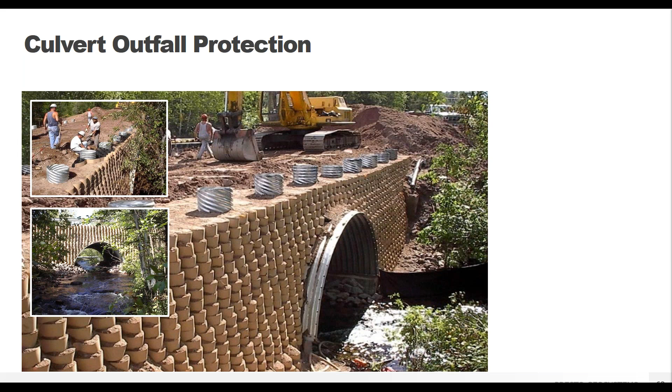We also often hear from contractors about how easy it is to install the GeoWeb system, even if they've never worked with it before. We do have installation guides and tutorial videos on our website, as well as providing on-site or personalized virtual assistance when required. Okay, so I'm out of time, but here's my summary.

Every project is different, but the GeoWeb system is going to have a solution that's right for you. The GeoWeb system can be added to road projects, can be used on slopes or in channels, can even build green retaining walls. So whatever your stormwater challenge, if you know you have extreme weather events that you're going to have to deal with, if you just want to have that little bit of extra protection, the GeoWeb system is going to be a great solution to make sure that you have a long-lasting, permanent, in-place solution for all of your project-specific requirements.

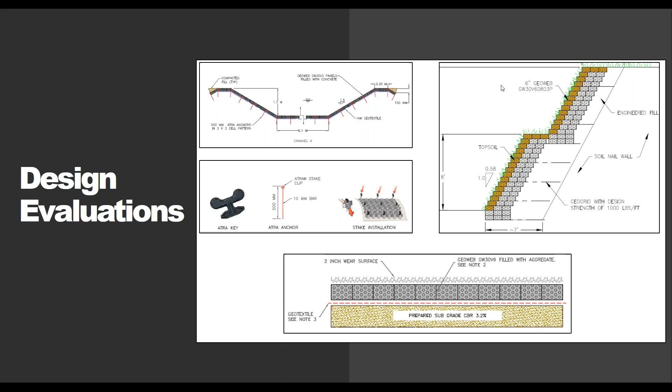You can include documents such as geotechnical reports, project site pictures, and other info like that. This comes directly to our engineering team, and then we provide our recommendation for what GeoWeb system is going to be the most appropriate for your site. We're going to include anchorage recommendations if we think extra geotextiles might be appropriate, and give you details that can be included in your plan sets. So we're going to work with you to get you the best design for your project.

We do deliver quality, and we have over 40 years of experience guaranteeing each shipment is going to meet or exceed our specifications, so you can deliver with certainty and build with materials you can trust. We have no disclaimers, no fine print. What we say is what you're going to get.